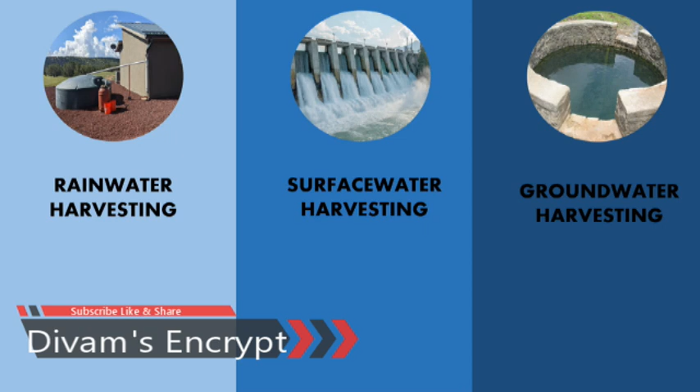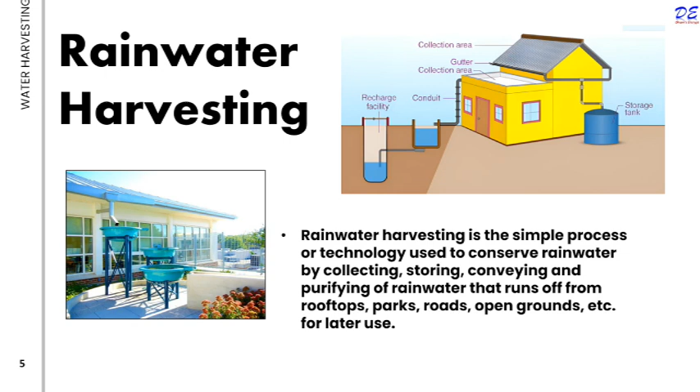Types of water harvesting. There are mainly three types of water harvesting: rainwater harvesting, surface water harvesting, and groundwater harvesting. Rainwater harvesting. Rainwater harvesting is the simple process or technology used to conserve water by collecting, storing, conveying, and purifying rainwater that runs off from rooftops, parks, roads, open grounds, etc. for later use.

How to harvest rainwater? Rainwater harvesting system consists of the following components: catchment, used to collect and store the captured rainwater; conveyance system, used to transport the harvested water from the catchment to the recharge zone; flush, used to flush out the first spell of rain; filter, used for filtering the collected rainwater and removing pollutants; tanks and recharge structures, used to store the filtered water which is ready to use.

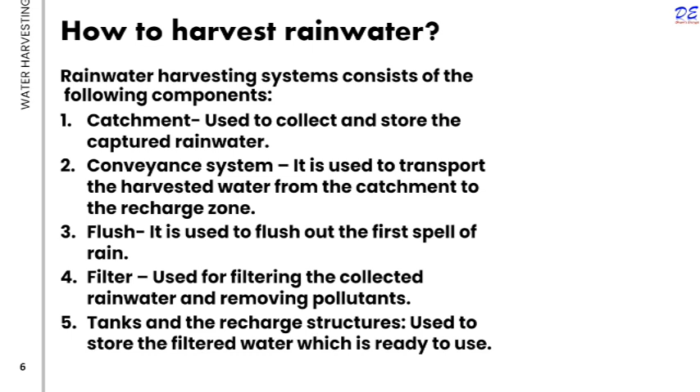Why do we need to harvest rainwater? Rainwater harvesting helps reduce water bills, provide a backup water source, and conserve water by decreasing reliance on municipal supplies. It prevents runoff, which can reduce flooding and soil erosion, while also benefiting gardens and landscapes by supplying plants with

clean, soft water. This practice offers immediate cost savings and a more sustainable way to manage water, particularly during dry spells or in areas with unreliable water systems. It is a practical solution for improving water security and resource management in a short run.

Advantages of rainwater harvesting. The benefits of the rainwater harvesting system are listed below. Less cost, helps in reducing the water bill, decreases the demand for water, reduces the need for imported water, promotes both water and energy conservation, improves the quality and quantity of groundwater, does not require a filtration system for landscape irrigation.

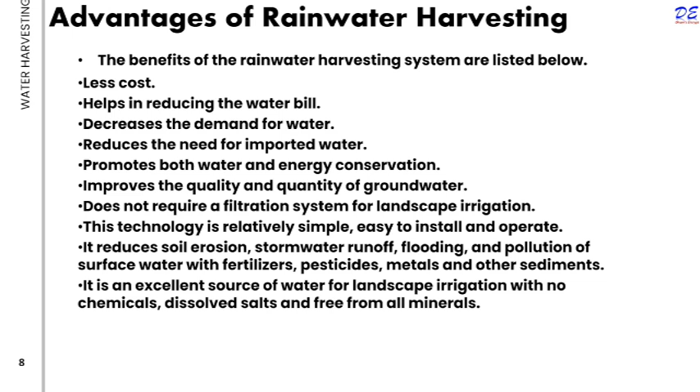This technology is relatively simple, easy to install and operate. It reduces soil erosion, stormwater runoff, flooding, and pollution of surface water with fertilizers, pesticides, metals, and other sediments. It is an excellent source of water for landscape irrigation with no chemicals, dissolved salt, and free from all minerals.

Disadvantages of rainwater harvesting. In addition to the great advantages, listed below are the few disadvantages of rainwater harvesting. Regular maintenance is required, requires some technical skill for installation. Limited and no rainfall can limit the supply of rainwater. If not installed correctly, it may result in attracting mosquitoes and other waterborne disease. One of the significant drawbacks of rainwater harvesting is the storage limits.

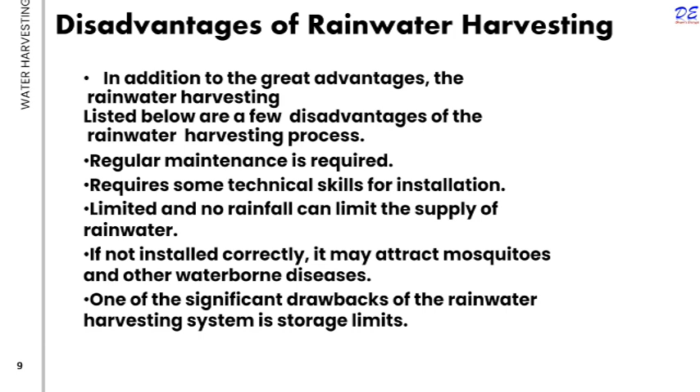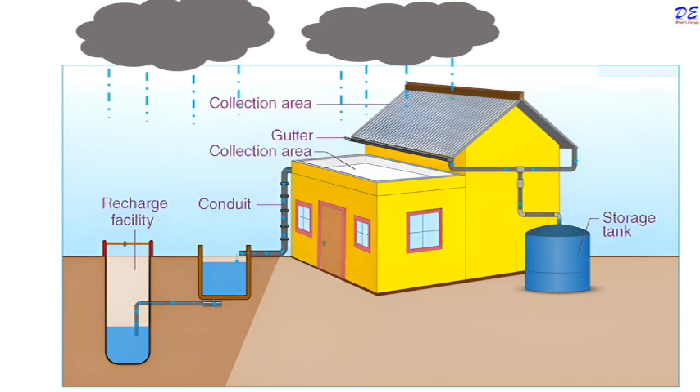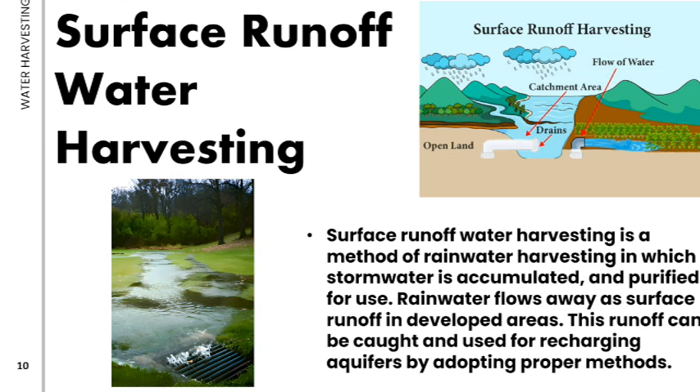Surface runoff water harvesting. Surface runoff water harvesting is a method for rainwater harvesting in which storm water is accumulated and purified for use. Rainwater flows away as surface runoff in developed areas. This runoff can be caught and used for recharging aquifers by adopting proper methods. How to harvest surface runoff water? Harvesting surface runoff water involves collecting water that runs through surfaces like roads, rooftops, and agricultural fields after rain or melting snow.

The water can be directed into various systems such as gutters or swales, which channel it to storage systems like tanks, ponds, or cisterns. These systems can be designed to filter out debris and sediment, ensuring that the water is clean enough for use. The stored water can be used for irrigation, livestock watering, or even household use in areas where fresh water is scarce.

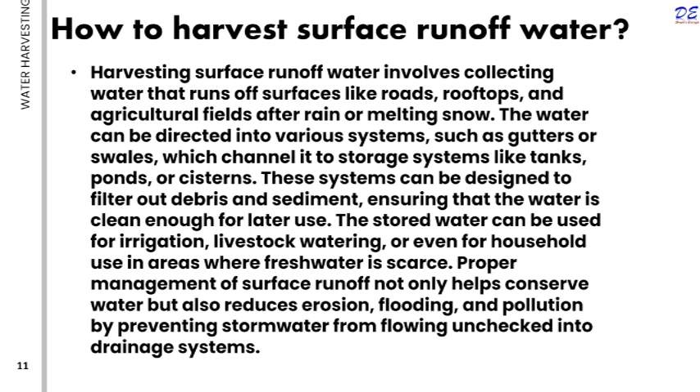Proper management of surface runoff water not only helps conserve water but also reduces erosion, flooding, and pollution by preventing storm water from flowing unchecked into drainage systems. Advantages of harvesting surface runoff water. Water conservation reduces dependence on traditional water sources, especially in water scarce areas. Flood mitigation. Collecting runoff reduces water entering storm drains, helping to prevent local flooding.

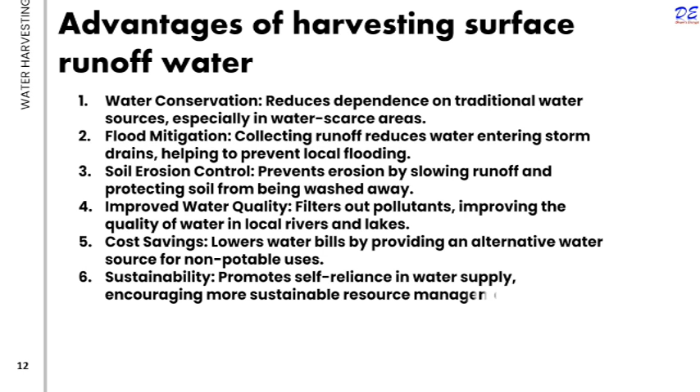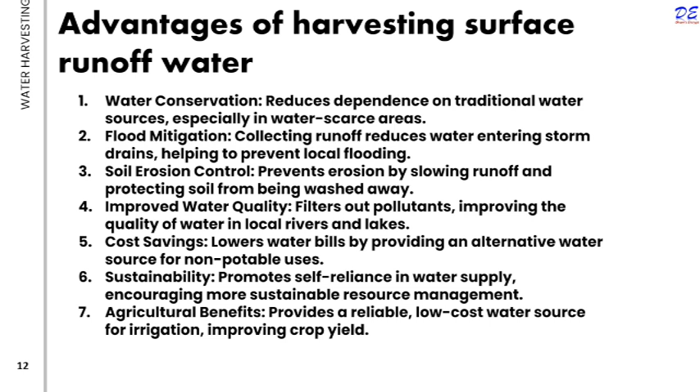Soil erosion control prevents erosion by slowing runoff and protecting soil from being washed away. Improved water quality filters out pollutants, improving the quality of the water in local rivers and lakes. Cost saving lowers water bills by providing an alternative water source for non-potable uses. Sustainability promotes self-reliance in water supply, encouraging more sustainable resource management. Agricultural benefits provides a reliable low-cost water source for irrigation, improving crop yield.

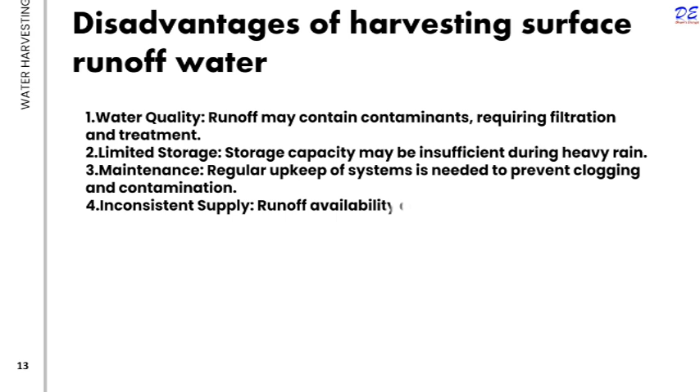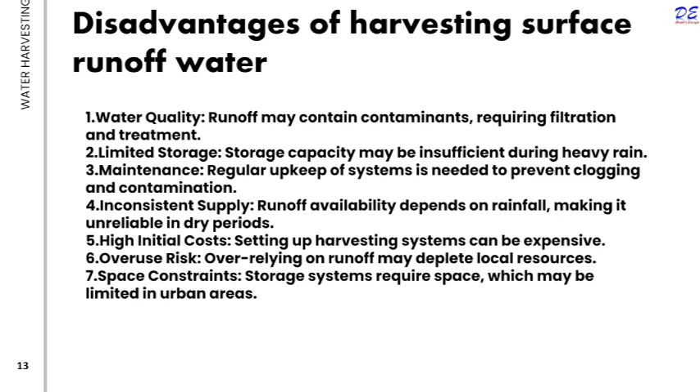Disadvantages of harvesting surface runoff water. Water quality. Runoff may contain contaminants requiring filtration and treatment. Limited storage. Storage capacity may be insufficient during heavy rain. Maintenance. Regular upkeep of the system is needed to prevent clogging and contamination. Inconsistent supply. Runoff water availability depends on rainfall, making it unreliable in dry periods. High initial costs. Setting up harvesting systems can be expensive. Overuse risks. Over-relying on runoff may deplete local resources. Space constraints. Storage systems may require space which may be limited in urban areas.

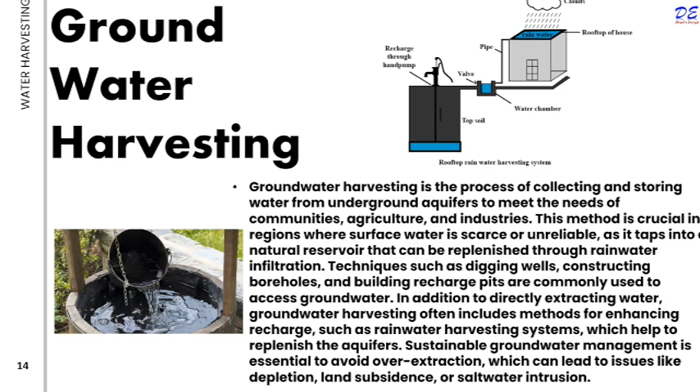Groundwater harvesting. Groundwater harvesting is the process of collecting and storing water from underground aquifers to meet the needs of communities, agriculture, and industries. This method is crucial in regions where surface water is scarce or unreliable, as it taps into a natural reservoir that can be replenished through rainwater infiltration. Techniques such as digging wells, constructing boreholes, and building recharge pits are commonly used to access groundwater. In addition to directly extracting water, groundwater harvesting often includes methods for enhancing recharge, such as rainwater harvesting systems, which may help replenish the aquifers. Sustainable groundwater management is essential to avoid over-extraction, which can lead to issues like depletion, land subsidence, or saltwater intrusion.

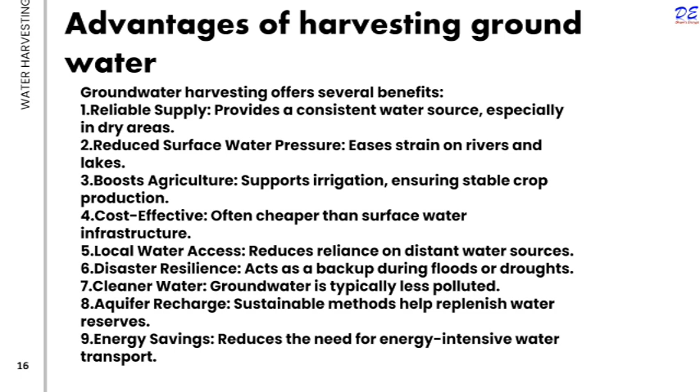Advantages of groundwater. Groundwater harvesting offers several benefits. Reliable supply provides a consistent water source, especially in dry areas. Reduced surface water pressure eases strains on rivers and lakes. Boosts agriculture, supports irrigation, ensuring stable crop production. Cost effective, often cheaper than surface water infrastructure. Local water access reduces reliance on distant water sources. Disaster resilience acts as a backup during floods or droughts. Cleaner water. Groundwater is typically less polluted. Aquifer recharge, a sustainable method to replenish water reserves. Energy saving reduces the need for energy intensive water transport.

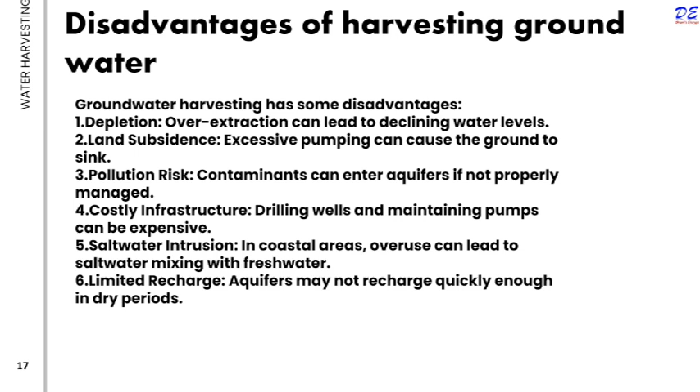Disadvantages of groundwater harvesting. Groundwater harvesting has some disadvantages. Depletion. Over-extraction can lead to declining water levels. Land subsidence. Excessive pumping can cause the ground to sink. Pollution risk. Contaminants can enter aquifers if not properly managed. Costly infrastructure. Drilling wells and maintaining pumps can be expensive. Saltwater intrusion. In coastal areas, overuse can lead to saltwater mixing with fresh water. Limited recharge. Aquifers may not recharge quickly enough in dry periods.